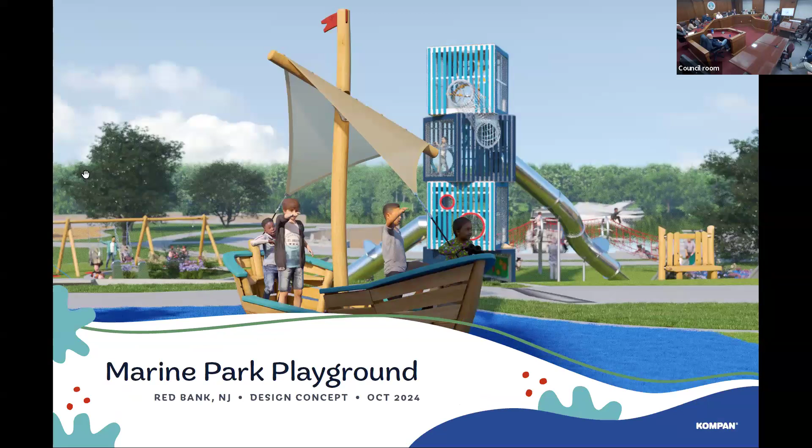For those of you who haven't driven down to Marine Park lately, I recommend it highly to get a sense of what's going on and how the job is moving forward, but they have begun.

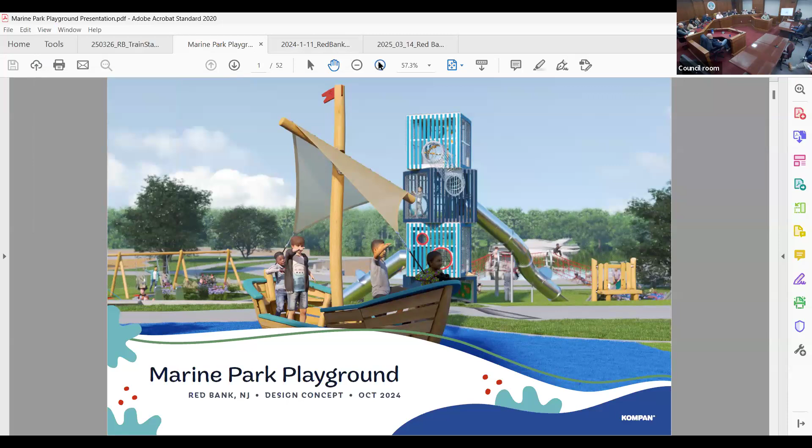Go ahead, Michael. Good evening, thank you for having me. My name is Michael Reiser. I'm a licensed professional engineer in the state of New Jersey, and I'm here on behalf of CME Associates, the Borough Engineers Office. I'm here in accordance with NJSA 40:55D-31 to present the plans for Marine Park to the Planning Board for capital review and recommendation.

As noted in the Borough Master Plan, Marine Park was significantly affected by Hurricane Sandy and required a phased approach to restore and improve the park for community use. Phase 1 consisted of flood mitigation and improvements to the bulkhead and walkway. Phase 2 consisted of a conceptual master plan. The borough hired Kimley Horn to create the Marine Park Master Plan based on community input. Key features included a children's play area, lawn areas, passive recreation opportunities, stormwater capture, waterfront access, and a welcome plaza. The plan I'm presenting today brings that vision to life.

Michael, bring that mic closer to your mouth for the folks in the back. My apologies, is this good volume? Everybody in the back here? Thank you. So if you would direct your attention to the poster board or the screen, I have here the overall site plan for the park.

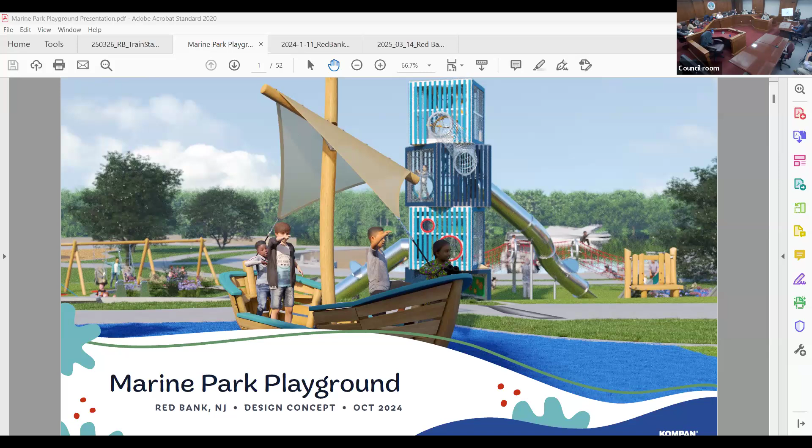Just to orient, we have Wharf Avenue. This is essentially looking north. We have Wharf Avenue on the right in that shaded area, and that goes up to Union Street where it intersects. That's Union Street there. And where you first pointed is the location of the existing parking lot, with the river in the top left corner of the plan.

Some of the proposed improvements include the big open lawn area where the existing parking lot used to be. That has since been deconstructed, and this is part of phase 1 of the plan that was included with the new porous asphalt parking lot installed at the location of the old tennis courts.

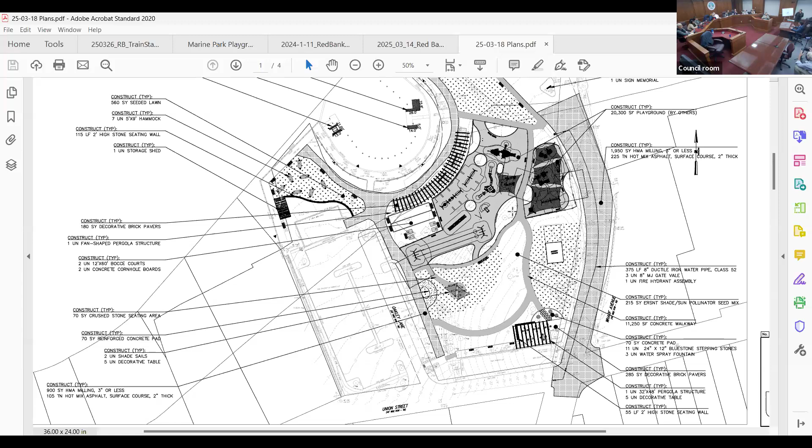The plan includes a large green space, as well as an amphitheater for events and passive recreation. There's talk of concerts there, different seasonal events, fireworks, a winter village type idea, farmers markets - really just a great space that better utilizes the waterfront, which was a big aspect of that Kimley Horn Master Plan.

Also included along the waterfront is a large seating wall that would wrap around the existing concrete walkway, and that's really just a space for the community to sit and view the river.

As you come around the Horseshoe Marina, we have a curved pergola in the middle - again, more seating area for the public to view the river and relax. On the other end of the horseshoe, we have the hammock area, which is going to have some permanent hammocks as well as a garden area and a seating wall.

Coming up the maintenance roadway, the existing asphalt roadway that goes around is for emergency vehicles and fire truck access. We have a small area for food trucks as well as a small seating area where folks can eat their food.

Right. Left, right between where, right, up a little bit. Down a little bit, right there. All right.

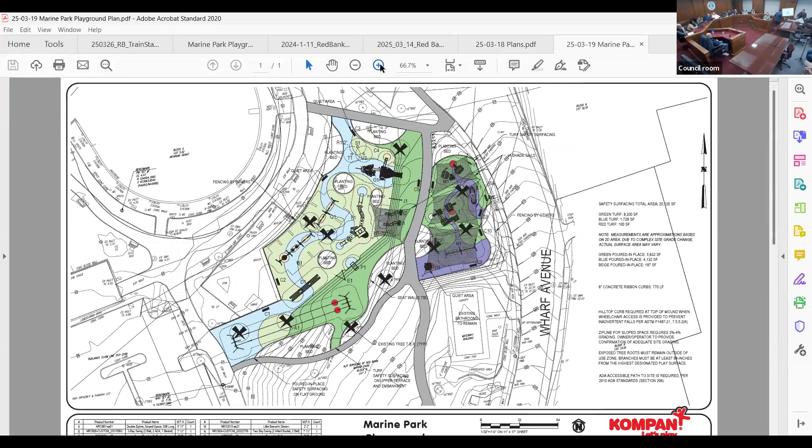Just to reiterate, here is the green space, here's the amphitheater, here's the seating wall along the river - this is the river here, here's the existing horseshoe marina. We have a curved pergola here with benches and seating areas for everyone to relax.

This is the maintenance roadway that's existing - the fire department uses this to access the fire rescue boat, as well as to perform general maintenance for the pump station there. This is our existing porous asphalt parking lot.

And then here is this area for potential food trucks, as well as a seating area for people to enjoy and eat some food, some picnic tables there.

As noted on that Kimley Horn master plan, we have here the entrance plaza area that includes a decorative pergola, decorative tables, and a decorative spray fountain as well, probably some signage - welcome to Marine Park.

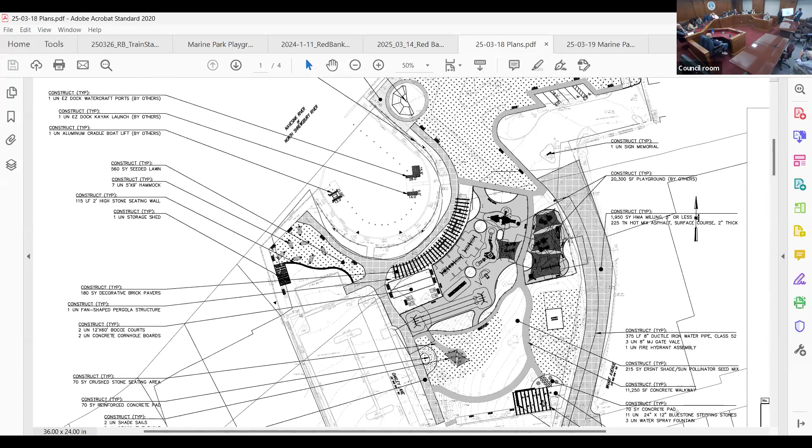There are other improvements as well. This hatched area shows some repaving to be done, which will connect into the repaving that's being done now. That's going to include an upsize in the water main that's necessary per the fire department, a fire hydrant here that we need for the fire department, as well as a new boat lift for the rescue boat to help save on maintenance and make access to the rescue boat more efficient.

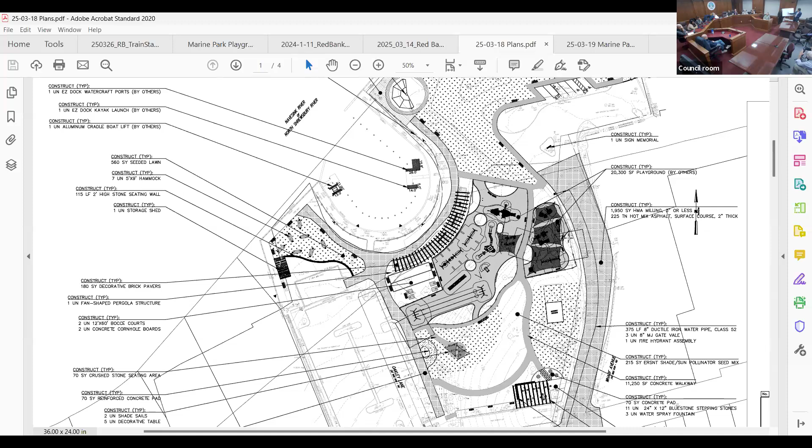Other waterfront features include a kayak launch, a kayak ramp, and a jet ski launch, and stormwater check valves on all of the outfalls, which would allow improved stormwater management. Stormwater would no longer be able to creep up those pipes and flood the park - it would just allow stormwater to flow out, and we feel that's really going to help improve the flooding of the area.

A main component of the park is this playground area. So I will switch it over to this, which is a more zoomed in photo of our playground area.

Just to orient you, this is the existing bathroom area here, and then this is the Wharf Avenue going down to the hill. Here's our Horseshoe Marina, and here we have the 2 to 5 playground area.

They require that you separate by ages - it's a playground specific requirement. This includes a little beaver town, a turtle stream, a small Oasis sailboat, as well as swings for infants - a lot of your typical elementary school type equipment. It's made of natural wood from a company called KOMPAN that we're using, for anyone that has attended the other meetings. John Marshall from KOMPAN can expand more on that.

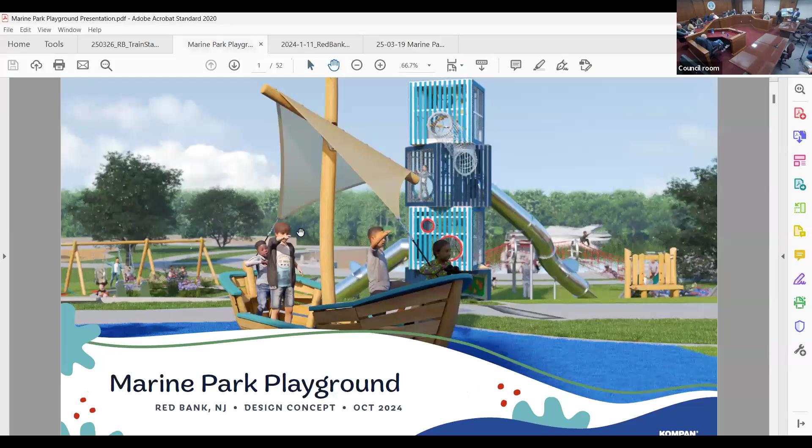Here you can see the existing horseshoe. We have that quad cube tower here, your tunnel bridge, pirate ship, as well as the little kids playground, little kids swings, their sailboat, the big swings there, and then the zip line off in the corner.

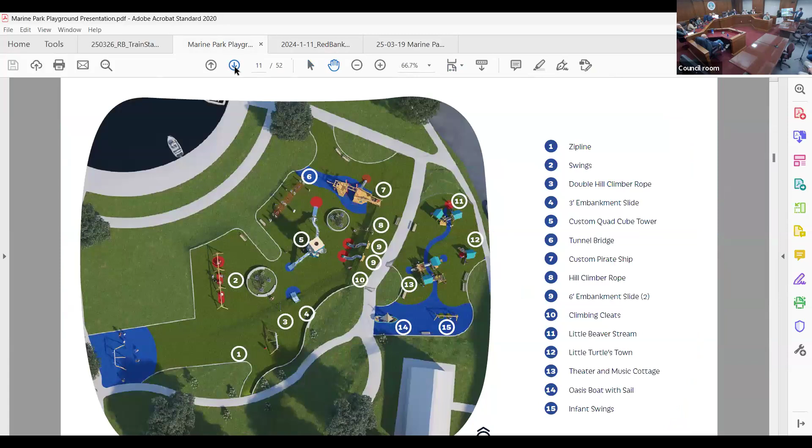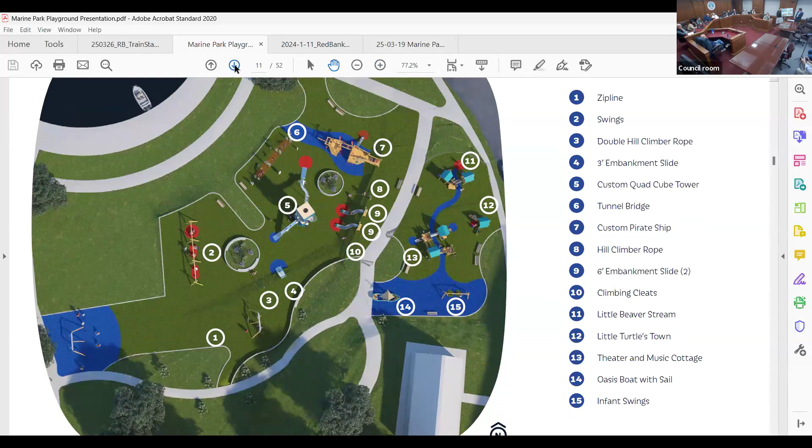We have here the embankment play with the slides, as well as the climbing rope and rock climbing cleats up the slope. Then we have our swings here, your standard swings, your ADA accessible swings, as well as the circular nesting swing.

I did want to note that the plan does necessitate some tree removal, so I've been working with the Borough Shade Tree Committee as well as the Environmental Commission on a proposed planting plan to make up for those removed trees. The trees have to be removed in the green space area, but a lot of those trees are unhealthy, and we've reviewed that with our tree expert.

In terms of the playground area, a lot of those trees had to be removed due to the grading required to make this a completely inclusive playground, which is what the borough has applied for a grant through Green Acres.

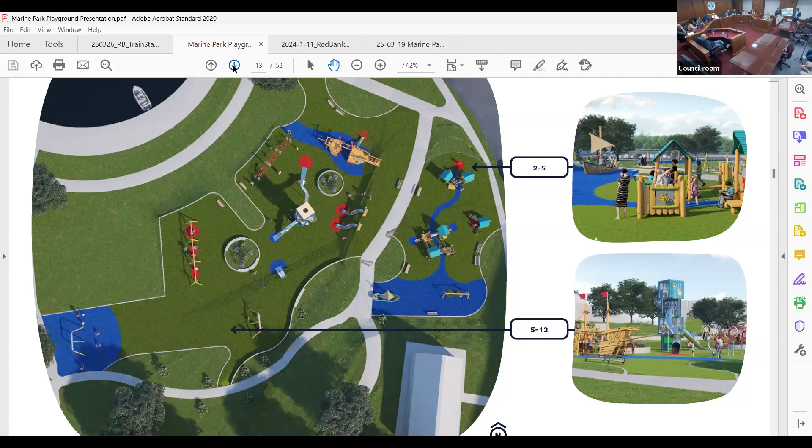Just wanted to touch on the state of permits. The CAFRA individual permit from the New Jersey Department of Environmental Protection, we received that today, as well as the waterfront development permit for the waterfront portions of the park. Army Corps of Engineers and Freehold Soil Conservation District permits are pending.

I just wanted to touch on the timeline. We anticipate going to bid for this project in the coming months, with construction starting in late spring, early summer, and the playground equipment being purchased and installed through state contract at the end of summer, beginning of fall. The goal is to have the entire park complete prior to the winter.

Excuse me, question.

You're going to bid, you say, but obviously work has already been done in the parking lots, and the old parking lot has already been removed and is in the process of being constructed. So obviously some of it is already in contract, correct? Yes, that's correct. Can you give me the pieces of it?

Phase one included construction of the new porous asphalt parking lot that's now where people are parking, and it also included getting started on the open green space. That includes removal of the existing parking lot and construction of a drop-off loop with a few spaces primarily for the Marina and Boondocks restaurant, plus topsoil and seeding that main green space area so it can be used as passive recreation space in the interim while we move to phase two.

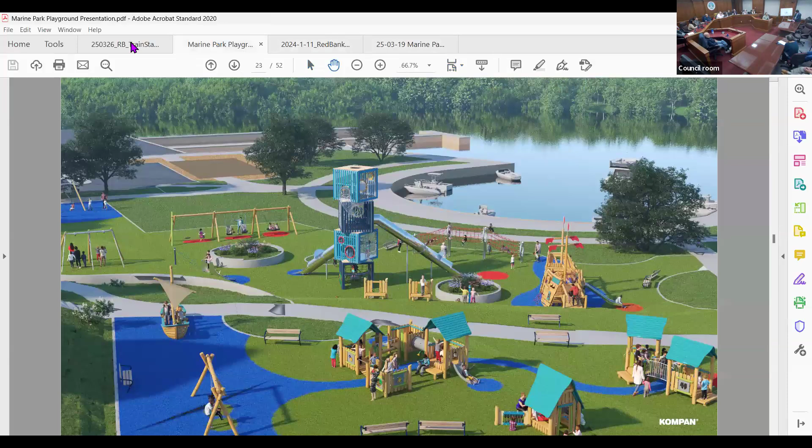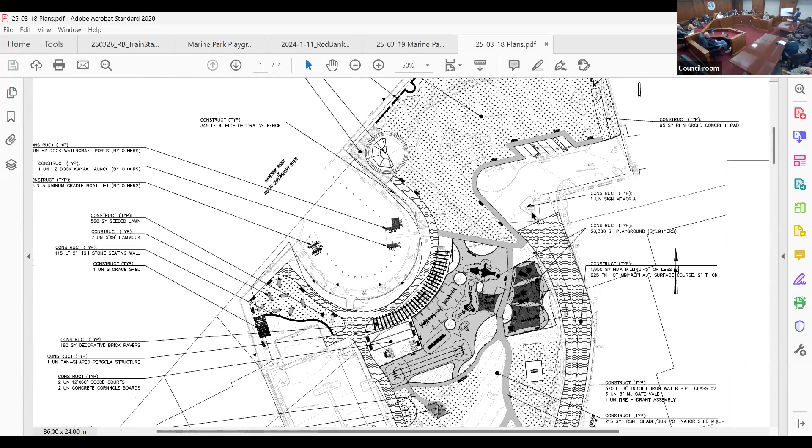Fourth Avenue, is there room down at the bottom there for cars to turn around when people head down there inadvertently and need to get out again? Yes, that central triangular island is gonna remain, and this is at least 40 feet wide here, for plenty of room to turn around.

I would like you to reconsider the location of the gazebo, because right now it's on the western end of the lawn area. If that's intended as an event space with concerts or performances on the gazebo, that faces the setting sun, and we have the same issue in Riverside Gardens Park at certain times of the evening - the sun is directly in your face. Maybe it should be facing the other side so you're not looking into the sun, but that's something for consideration. Yeah, it's something we'll consider. There's also the option of doing a backdrop behind it as well. That's a good point.

Is there any plan to spruce up the interior of the restrooms? Yes, that's actually part of the Green Acres application. That's great, because they look like prison cells now with those stainless steel toilets.

My one pet peeve, and I think this is part of code - when you sit on the benches there, your view of the river is completely obstructed by the railing. And if you sit there in the evening, the current lighting has been blinding and completely ruins your night vision. So if you go down there to gaze across the river in the evening, it's like sitting next to headlights. So what's the plan for lighting here?

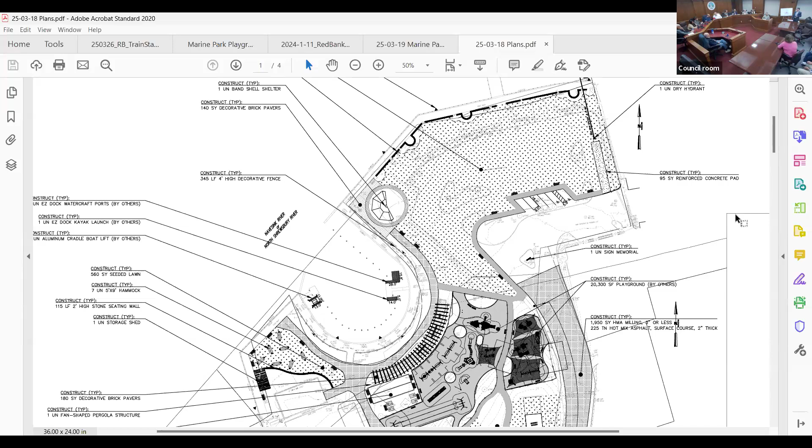But all of the improvements within the flood zone would be designed in accordance with the flood hazard area rules. DEP has reviewed this plan as part of the Coastal Area Facility Review Act, as well as the flood hazard area rules. So our gazebo will be designed with proper footings and anti-flotation materials, and the playground equipment will have footings as well. The playground manufacturer, KOMPAN, has had several playgrounds installed in areas in Florida that have seen hurricanes and held up very well.

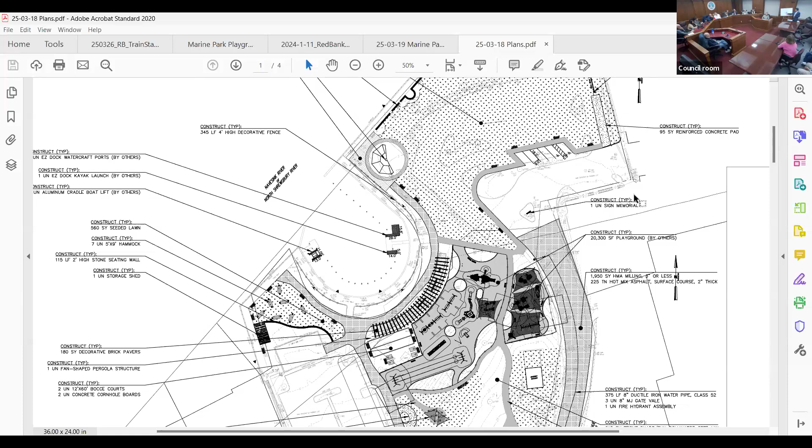I also wanted to ask about zip lines. At some point I heard this incorporated zip lines, is that true? Yes. They're still there? Yes, what's shown here is a two-person zip line, side by side. Adults, children, who is it for? It can hold adults as well. What's the weight limit on those zip lines? I don't have the exact number.

I'd like to suggest that zip lines don't seem compatible with the purpose of this park, and the liability must be enormous. It can't be any worse than monkey bars—I fell off of everything possible as a kid. I would like to think the mayor and council, and whoever their insurance company is, have thought about this plan. So it's been approved by? Well, maybe the engineer did, or not, but all of it is a lawsuit waiting to happen today. Sure, and hopefully at some point that will be taken into account.

I love the idea of the zip lines. The first thing I thought of was falling and breaking my neck, which I'm going to try not to do when I zip line down this thing. But I see your point—these are playground designers who do this, so I'm going to guess it's not the end of the world from a liability standpoint, or somebody would say no more zip lines. But I would love to say now, in front of the mayor and council members, that we should definitely look at this from an insurance standpoint, to make sure we're not going to get killed on liability insurance for this park because it has a zip line.

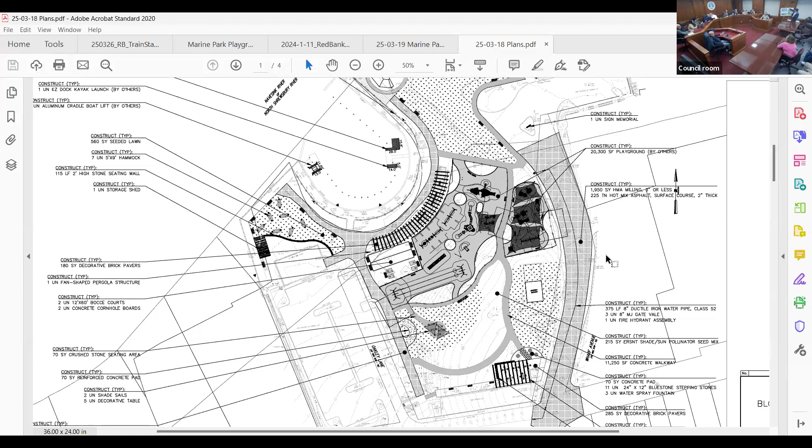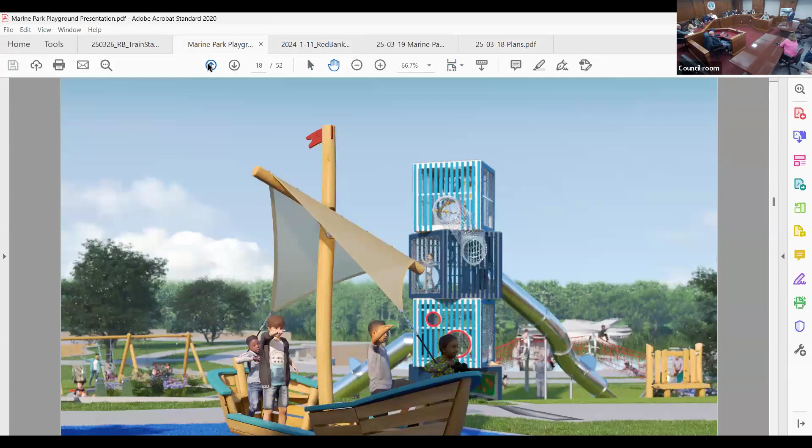You can see it slightly in the renderings, but it's similar to a setup like a swing, with the two posts, and then it goes across. That's been specifically designed at the corner of the park, away from other improvements, because of the potential issue of kids running around - I had nightmares of a kid running into the middle of this thing while someone's on it, and that's why we've specifically designed it to hopefully avoid that incident.

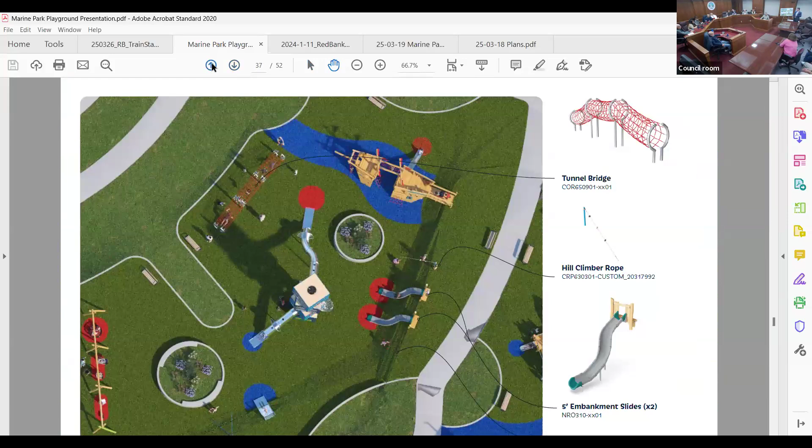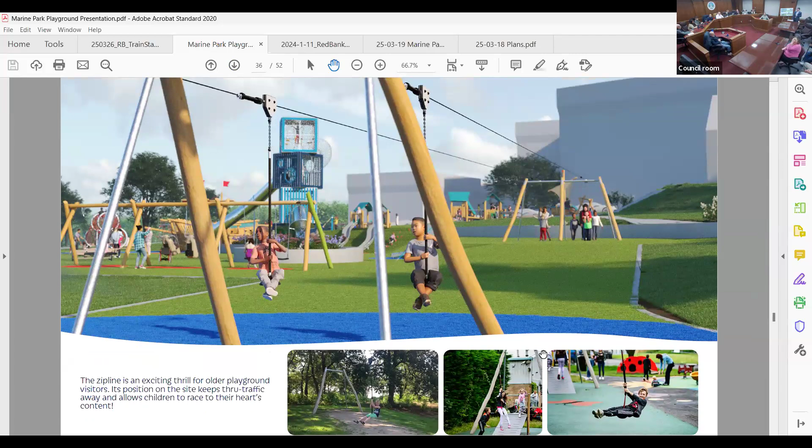Will someone man the zip line all the time, or does there need to be a person there taking care of it? We're going to have somebody there, not necessarily an attendant, but so kids don't just go up and zip back and forth unsupervised. Is there a reference for this? If you look on the screen behind you, we think that's a zip line - the kid on there, the playground manufacturer, a big guy, has assured me that he's ridden on them and he looks okay. All right, I'll cross my fingers on the zip line.

One last question - you mentioned about 100 trees and other plantings as part of this project. How many trees are we losing total? There's a total of 56 existing trees in the park, and 19 of those would be removed. 7 of them were recommended for removal by our licensed tree expert who did a tree assessment, many of those in the green space. So you have 19 being removed, with 29 new shade trees, 28 new ornamental trees, and hundreds of shrubs, perennials, and ornamental grasses throughout the small planting beds where trees can't fit.

I do lament losing any trees that we don't absolutely have to, because they're old or sick or whatever, but that is a shame. I understand progress, but I'm sorry to see those trees fall. And that's all I have to say. Thank you very much.

Anyone else in the public have any questions or comments? Steve Ansell, 39 Branch Avenue. I think you mentioned that there is going to be a kayak and a jet ski launch.

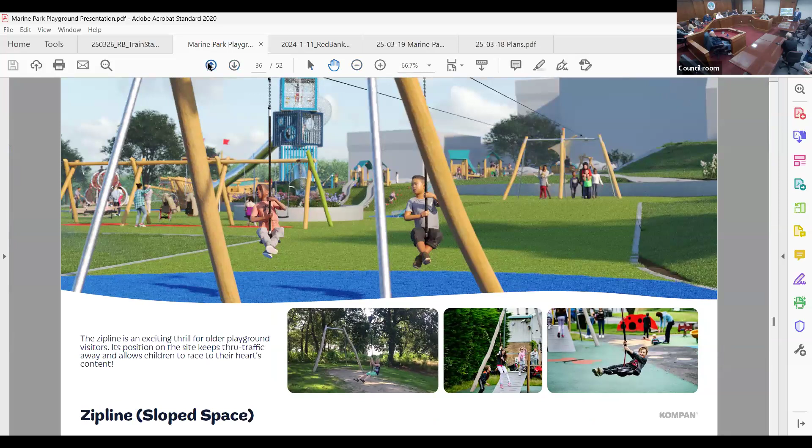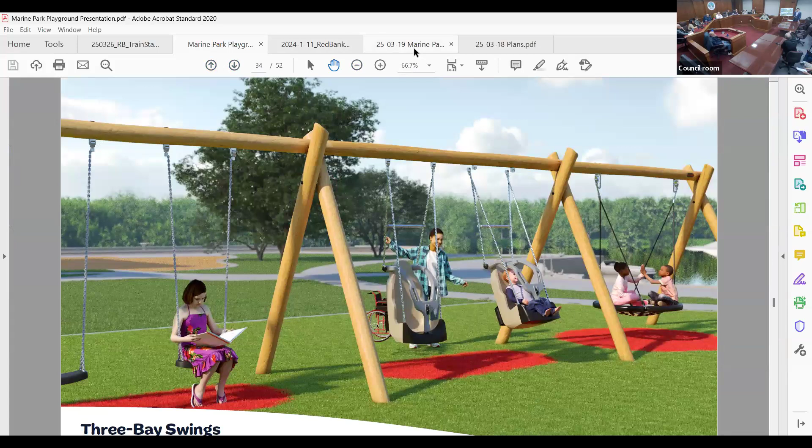Yes. I used to be a jet skier, not anymore, but I might take it up again. If you're towing a jet ski, there's a trailer - is there room, like half a dozen parking spaces down by the waterfront, are they going to be big enough to incorporate a trailer? They're standard size parking stalls right now, but there is kind of a side pulling zone, perhaps the borough would consider making that a loading zone of some sort.

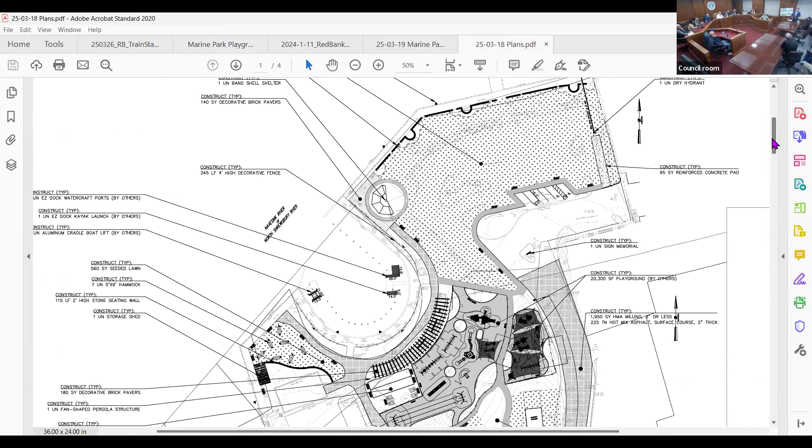It's worth noting the waterfront improvements require Army Corps of Engineers approval, so we're currently in that process. We had to get the DEP permit before we can go before that, so those improvements may, depending on how soon we get the permit, end up being almost an additional phase. But yes, that is incorporated within the horseshoe route.

I guess the other question, you probably don't know this, is in terms of permits to be able to launch a craft on the river - is that something that's going to be required by the town? I'm assuming normally it is, but do you know whether it's going to be part of it? The reason I ask is once you put something like this in, lots of people come in from all over different parts of the local area.

I'm just thinking that if it's something for Red Bank residents, maybe for retirement income, I might just stand down there with a change maker and get some money out of people. I'm getting nudges of no from several people that there's no permit necessary to launch a jet ski, although if we can make money at it, we should think about it.

I'm already paying for a permit at Shrewsbury River, so I could appreciate not having to pay again, so thank you. You're welcome. Anyone else in the public with any questions or comments? Sir, come on up.

165 Spring Street. I'm a daily visitor to the park. And you were aware of the condos, correct? Yes, the $1 million condos, there's that access road above and whatnot. Now, are you aware of the broken up existing drainage for storm flow, overflow?

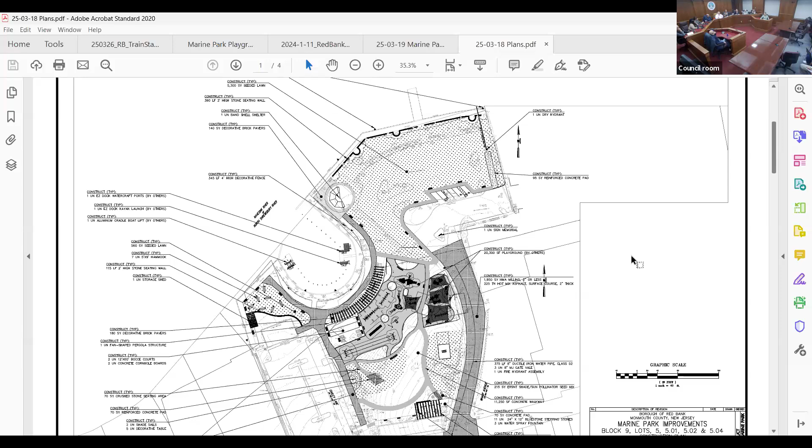I make a motion that the planning board recommend this plan to the mayor and council, and I'd like to see the specs on the zip line and the other thing, so that I can go down there and have a good time. I also recommend, as part of my motion, that the position of the sun in the afternoons there for performances and for people using the large grassy area be taken into account. It is a tremendous amount of sun in the afternoon, and it is hostile down there as the sun sets. There's no doubt about that.

We have a second to my motion. Second. Can we do it all in favor? No, let's do roll call. Mayor Portman, Yes. Christina Bonatakis, Yes. Sammy Kuso, Yes. Lou Demento: Could I put in a recommendation that they guarantee that the trees on the new parking lot are watered?

If not by irrigation, then by bags, but make that a requirement. I'd be happy to add that to my motion. Okay. Yes. Barbara Boas, Yes. Wilson Bibi, Yes. Itzel Hernandez, Yes, absolutely. And Brian Carnigan, Yes.

Ladies and gentlemen, now for the main event: a 10-minute bathroom break, and I mean 10 minutes, like I'm not kidding, 10 minutes. It's 8:35.

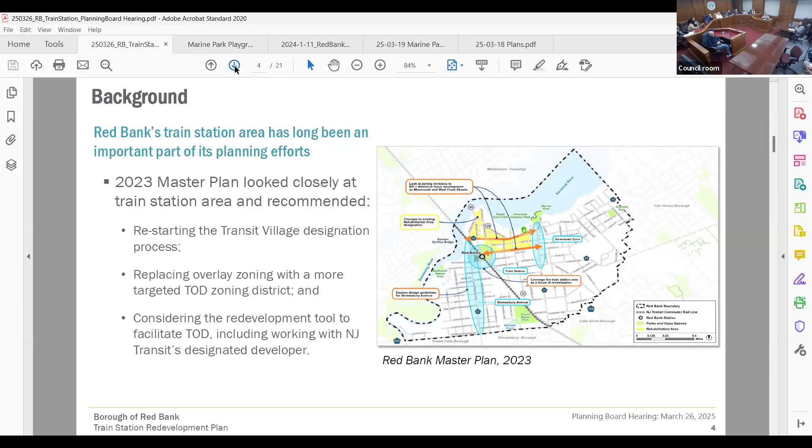Just to recap how we got here: back in December 2023, the governing body authorized the planning board to do a preliminary investigation of this area to determine if it met the criteria for redevelopment. We initiated that process, that study, in January of 2024.

It took a couple months, we came back to you, the board, presented that study, and you made a recommendation to Borough Council to designate those areas that did meet the criteria for designation as redevelopment. The council made that action in April of last year.

It got a little wrinkled because there were additional 6 properties as we got into the planning process, and these 6 properties were owned by New Jersey Transit. It became apparent that they had not been included from the get-go, but they should have been. So another study was initiated to look at those, bringing them into the overall redevelopment area. Did those additional properties meet the criteria?

This board recommended that they did, and the council agreed and found that they did meet the criteria, and added those six properties to the designated area just in February. So all of that has brought us to where we are now.

This is the conclusion of the planning portion of this phase, the plan that you have before you tonight. Potentially, if this board makes a positive recommendation to Borough Council, the next step would be for council to adopt this redevelopment plan, possibly next month. That's obviously dependent on the outcome of tonight and any future meetings.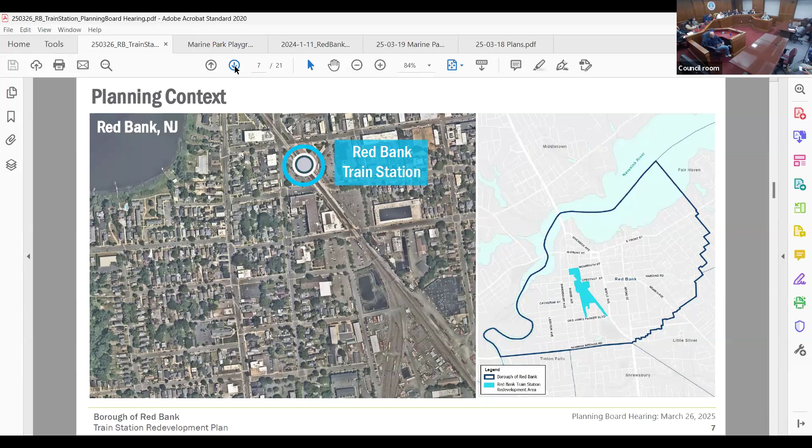So in terms of the plan itself, as I said, the meat of that plan is 40 pages. It starts out describing the area itself, a bit of the background process, the redevelopment process as a whole, and how the borough came to this point.

There's a set of goals established specifically for this redevelopment plan, and we have to look at how this plan interacts with the master plan as well as other local planning objectives and documents. Then we get into what is essentially the zoning that goes into this redevelopment plan - the sub-districts and how those come into play, which I'll talk about - along with a whole host of standards for area, height, bulk, general planning standards, and the design criteria and design standards that are part of these.

We do have a number of statutory elements we have to look at in terms of plan consistency with all of your neighboring communities. So anybody that abuts Red Bank, we need to look at how this plan is consistent with their master plans. There's a whole host of implementation pieces that we'll telegraph and talk about at the end, basically everything this plan will need to be implemented, plus next steps. We also have to give a summary of how we're meeting the different statutory requirements. And then there's a set of definitions, basically zoning definitions. In some cases they supersede the zoning definitions in the rest of your code, but in others they're just more tailored and specific to this train station redevelopment plan.

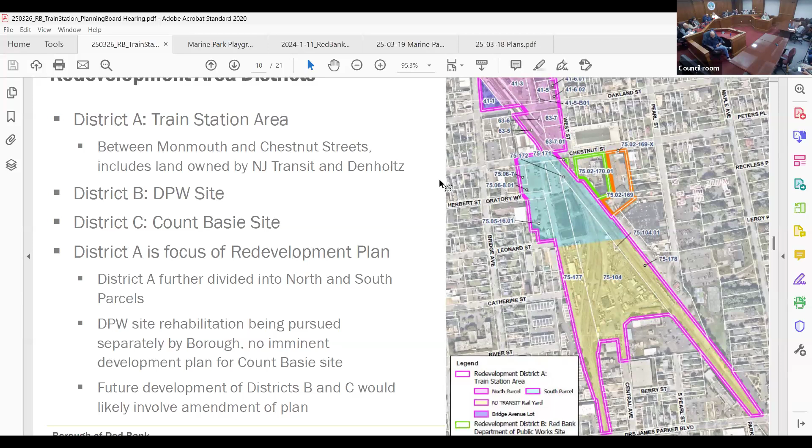Within the general focus of this plan, District A, the train station area, is further subdivided into the north parcel and the south parcel. The north parcel is shown shaded in pink, and the south parcel is shown in blue or teal. They're separated because their context differs a bit. The north parcel is close to the train station, on Monmouth Street, with more connection to the commercial core—lending itself to a true mixed-use environment with more commercial space. The south parcel is closer to residential neighborhoods, maybe lending itself more to a residential focus at a slightly different scale. So you want to think about different standards for each area.

What you see in yellow is the rail yard, which will stay basically as is, fenced off as it currently is from the public—that's not going to change. There are some long-term ideas there, but that portion of the redevelopment area is as is, and anything that might change in the future regarding development would again require an amendment to the plan.

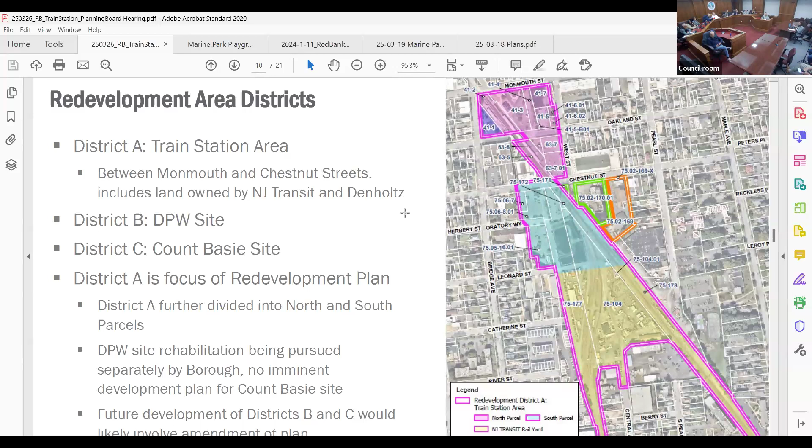Multifamily, both market rate and affordable, as well as mixed use in that context. A really broad array of retail, except tobacco shops, personal care, urgent care, banks as long as they're not drive-through—we actually heard at a workshop a desire for banks, since there are none on this side of town. Restaurants and food service uses, museums, performance space, art galleries, artisan workshops, really anything related to arts and cultural space. Breweries, brew pubs, distilleries, bars and lounges, preschools and childcare—that's something we've heard strong interest in from the community.

Indoor recreation—really anything in the fitness realm, obviously traditional gyms, but also classes, whether exercise or leisure-oriented, with a whole host of options. Co-working space, community nonprofit uses, what's called essential services—those are defined by the borough and allowed in most zones. Retail cannabis, and public open space and related amenities, plus the transit and all the related amenities that go with that. These are principal permitted uses.

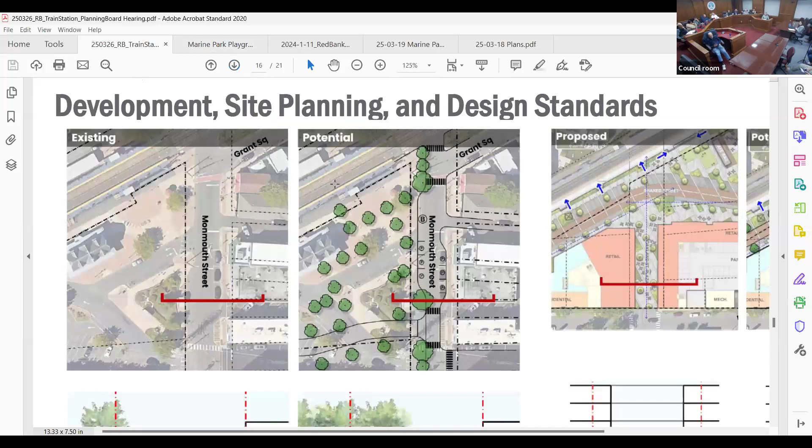So here are just some concepts on the next slide, meant to be illustrative of the standards and guidelines in the plan. This is Monmouth Street—we know the borough also has plans for upgrades here, with opportunities for more trees, pedestrian improvements, slight differences to the roadway, and crosswalk improvements. On the right, you see the proposed Oakland pedestrian passageway I was just talking about—keeping it free and clear for the public with good sight lines to the train station itself. There's a minimum width to make sure it's an ample, generous walkway that will really be usable by the public.

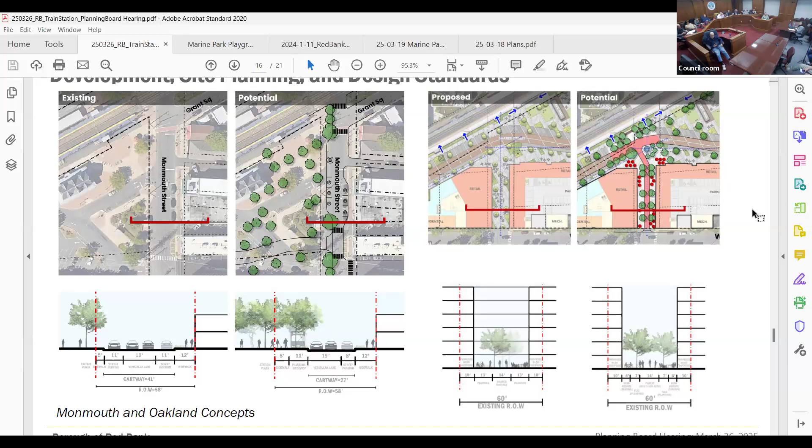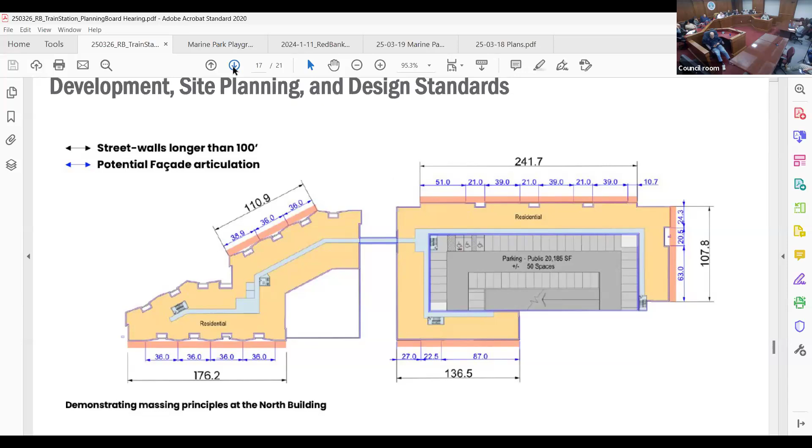Next slide, we get into some of the building massing items. This looks at where you have long facades, which sometimes isn't avoidable—we'd prefer shorter facades, but building designs can't always lend themselves to that. So there's a lot you can do with the vertical and horizontal elements of building design to break up those facades, particularly along the roof line. We've seen new apartment buildings with a constant hundred-foot or longer roof line that just looks like a giant block, so that's what we're trying to avoid. Breaking that up makes it more pedestrian scale, more user scale, and leads to the high quality development we're looking for. These are just some massing illustrations that are part of the plan.

And then there's a series beyond the bulk standards, beyond the design standards—a grab bag of other standards and requirements that any developer would be required to meet when it comes to site plan application.

They will need to submit building elevations and renderings from all viewpoints. As part of that site plan application, the planning board is authorized to request a materials board. We've seen this in other communities where they actually have to show you colors, the materials. It has to be a physical board available at the municipal building, so the public can go look at it. That's a really important way to understand what you're going to be looking at.

Stormwater management obviously needs to meet the most stringent requirements with a focus on green infrastructure. Traffic and parking, we know, is a major concern for folks. So this plan requires completion of a traffic and parking study prior to submission of a site plan application. The contents of that study will be agreed upon with the borough as part of the redeveloper agreement, but it will look specifically at traffic generation, analysis of bus routes and bus stop locations, turning movements, and whether improvements are needed to accommodate those changes.

There is a minimum set aside. It has to be on site, cannot be put elsewhere, and cannot be paid in lieu. So there will be affordable housing on this at a minimum of 20%.

Public art and murals, we're suggesting that they be incorporated throughout. There is a real opportunity here to create a sense of place and build on the artistic community that's already here. And then lastly, there are provisions for a construction and phasing plan.

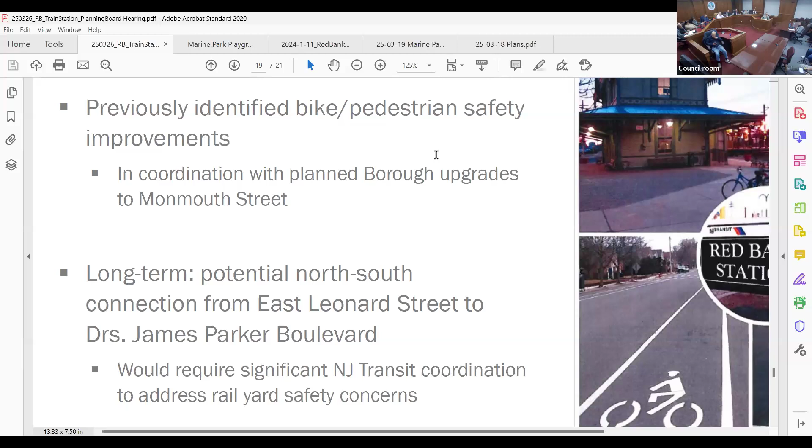This is an area of town that the borough has spent a lot of time planning, and New Jersey Transit has too. We've had a lot of study over the years of bike and pedestrian improvements. We know there are issues, accident histories here, so there are opportunities to improve crosswalks, sidewalks and bike lanes. We've put together some of those prior planning efforts - the report you see on the right is from 2018, and there was also a bike pedestrian plan from 2010. To the extent those recommendations remain relevant and aren't being undertaken by the borough as part of the Monmouth Street project, there's definitely an opportunity, and we've highlighted specific improvements that should be discussed with the developer.

A long-term plan, which we heard a lot of interest in from the public in the workshops, is trying to create greater connectivity north-south. We know the rail yard and the overall train station area disrupt the street grid. It kind of is what it is, but there's potentially an opportunity long-term as part of this planning effort to get a connection potentially as far south as Parker Boulevard. It will be an improvement even just through this proposed development because the rail yard is going to be pushed down a bit - the current gate will be pushed down to Leonard Street. So the borough is already going to pick up another two blocks of pedestrian roadway connection in that area, an improvement north-south, but there is an opportunity much longer term.

There are obviously security concerns New Jersey Transit has - it's an active rail yard and will remain an active rail yard. They do not want people walking through it, so it would have to be something along the periphery, gated and walled, protecting the rail yard and the people nearby. That's a long-term plan proposal. It requires coordination with New Jersey Transit, but it is in the plan.

A couple other improvements which aren't on the slide, but we talk about West Street. Most folks know that as part of this plan, there is a proposal to relocate the existing bus stop, which is internal to the site near the train station building itself, to West Street. That has been vetted by New Jersey Transit and, as we understand, is their preferred location for that relocation, but it clearly is a change on West Street. There needs to be some analysis of turning movements and widths to make sure that's a safe and effective alternative, so there may be some offsite improvements needed there as well.